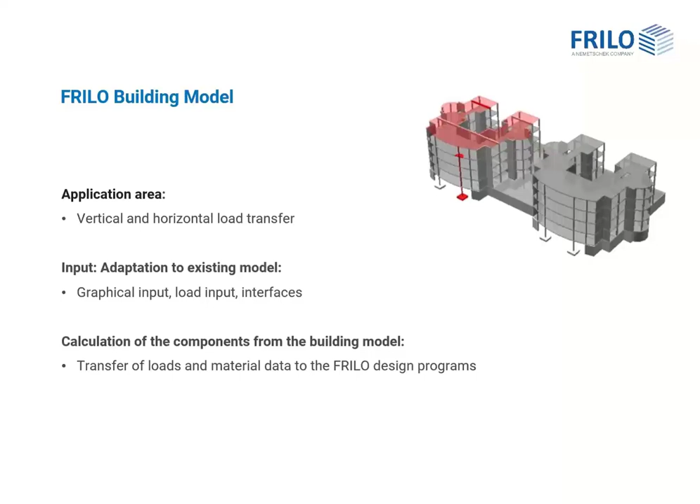And after this, we want to look at how and where the loads and material data of the building components are transferred to the FRILO design programs. But now let's begin with the vertical load transfer. The building model calculates the vertical support forces using a plane finite element calculation on each floor, and both the entered loads and the dead weight of the building components are taken into account. The support forces calculated at the base of the building components are distributed evenly over the length of the walls, and they are all transferred to the floors below.

So the program calculates the vertical loads downwards from floor to floor. And this is executed until the program does not find any further building components, like a ceiling, a wall, or something else, at the base of a wall or a column. So if the program does not find any more load-bearing building components, a foundation is created at the base point. So this allows the foundation loads to be calculated quickly and reliably.

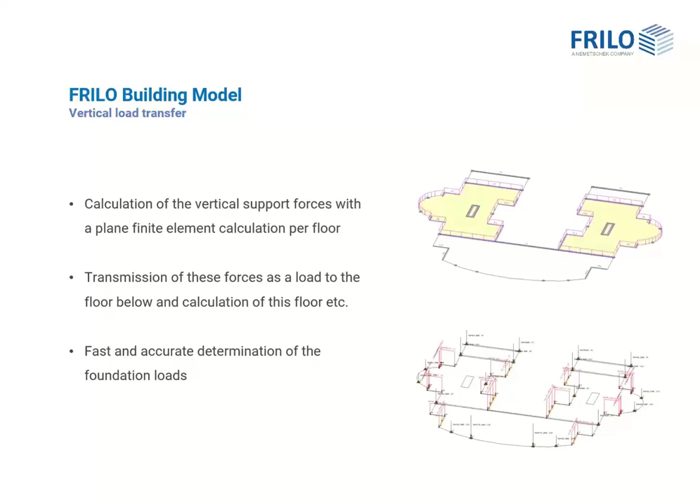The horizontal loads are distributed to the walls and columns which are defined for the horizontal load transfer, and this is according to their bending stiffness. And these horizontal loads can be entered manually or calculated internally by the program for wind, earthquake, and inclination.

Each moment at the foot of a stiffening wall, resulting from the height of the floor, is converted into a force couple and applied to the floor below. So if the system does not find a load-bearing wall, the resulting load is distributed to the other walls in this floor via a finite element calculation. So this means that even non-continuous stiffening building components can be taken into account.

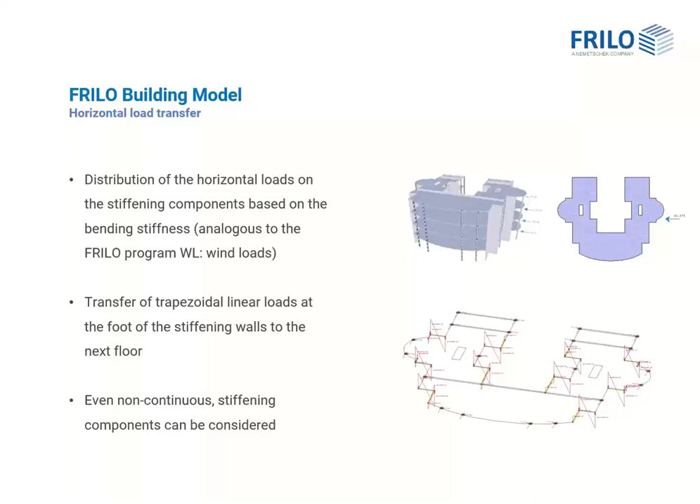The entire calculation in the building model is always performed for the characteristic loads and is therefore completely independent of the safety concept. But to transfer the building components to the corresponding design programs in FRILO, the design standard can already be assigned to the building components in the building model.

And also in the building model, the action groups are already assigned to the load cases, which are also required for the transfer to the design programs. And this enables a simple transfer of the loads and the support loads to each design program.

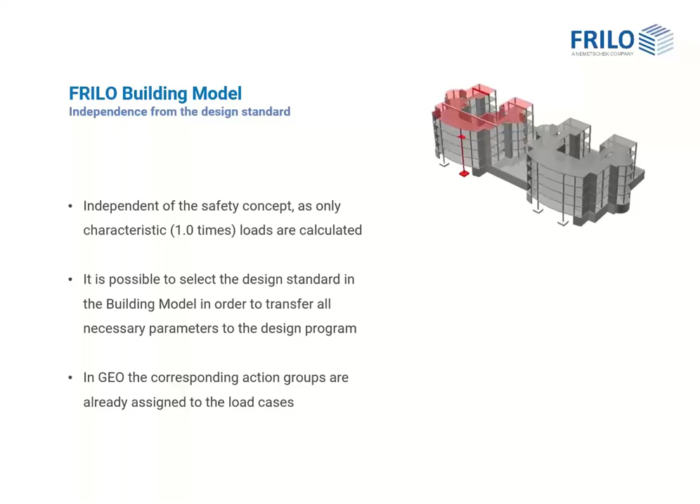So now let's take a look at the calculation approach. The building model is not based on the approach of a folded structure. Therefore, there's no three-dimensional calculation like SCIA does. Each floor is considered individually, so the calculation takes place floor by floor. And this means that a wall in the basement is unaware of the stiffness of a wall in the upper floor. And only the bearing forces of one floor are transmitted to the floor below.

For the horizontal load transfer, only non-displaceable systems can be considered. Something like a pure frame system would become too soft, as the frame effect cannot be taken into account.

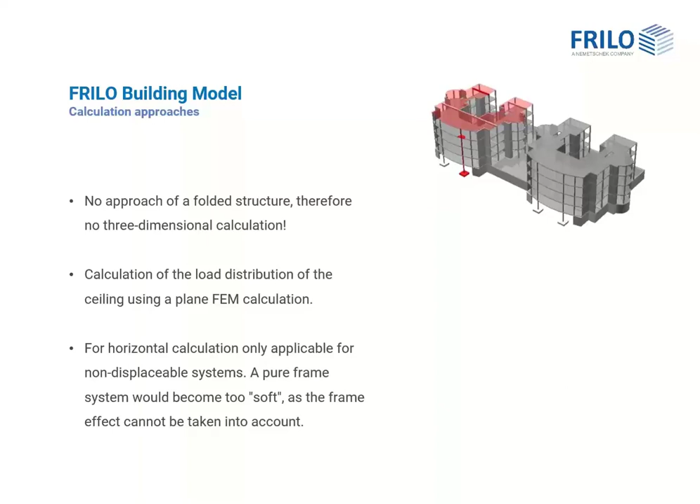So now let's take a look at the input of the floors. There are different options for entering the floors. Of course, the building can be entered using coordinates via the graphic interface, and a floor can also be entered using an imported DXF file, and this file is inserted as a background file, and the program can use the data from this file as snap points, and this is for the input of all building components and loads.

Then it's also possible to import the building data using the interface to CAD programs such as Allplan or Glaser. And after the calculation, the design results can be transferred back to these CAD systems. I will tell you more about this later.

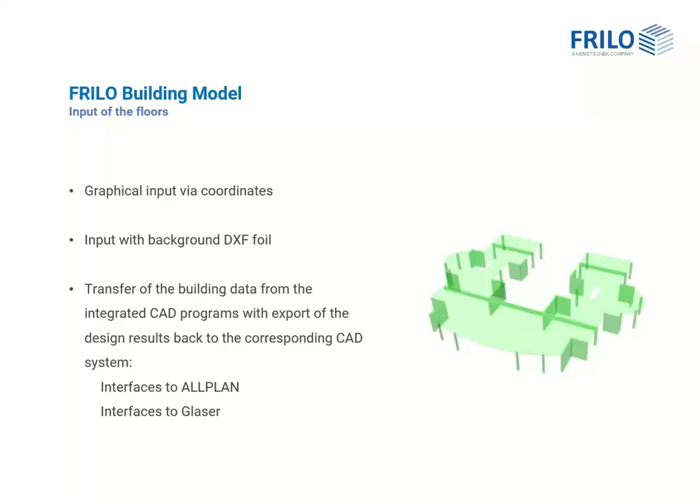But now let's take a closer look at some of the graphical input and the load input in the building model. As this webinar is intended to give you more of a general overview of the building model, we will now assume that I have already entered a floor slab into my building model. And therefore, I would like to show you some, I would say, special features when entering a building with our FRILO building model.

At first, the program always offers an overview of all entered floor levels. And there it is always possible to rename these floors as I wish. So now that I have entered my first floor as a slab, I wanted to define some loads on it.

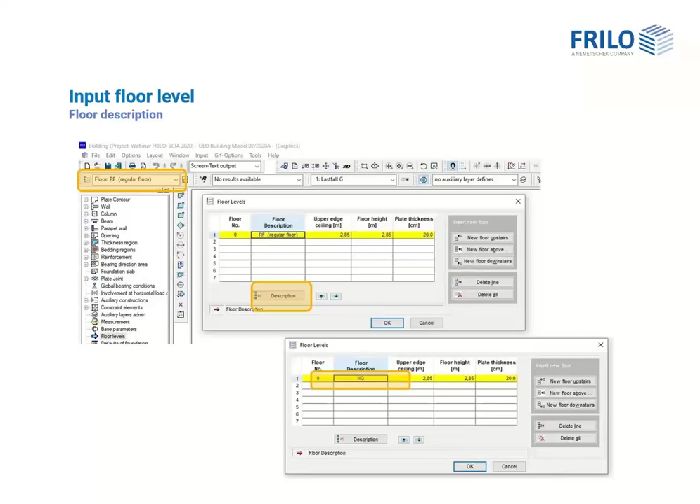The vertical loads are entered floor by floor and defined according to their action group in different load cases. The loads in one load case are always applied together. So be careful, there's no automatic recognition of the unfavorable load position of a surface load. So a load distribution by fields is only possible with different load cases.

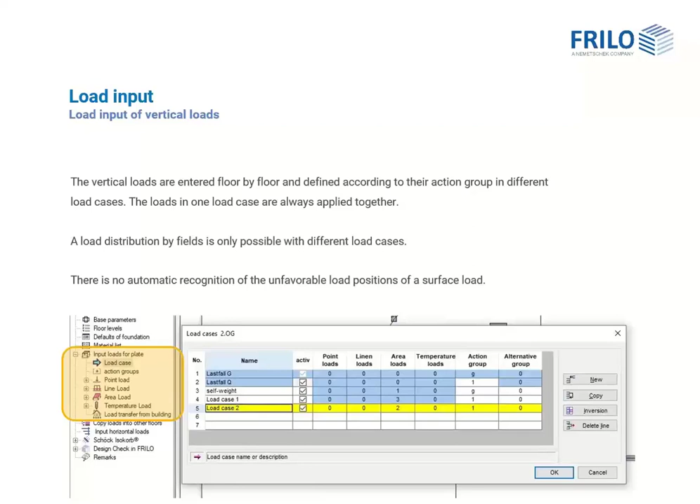So now let's assume that I have now entered all the loads on my first slab. And now I can open an overview of my already entered floor in the program. And there's the possibility to copy a whole floor with all of its components and loads. And let's say, for example, I copy my existing slab one floor up. Then the program asks me if I want to copy the data of this slab into my new floor. We accept by pressing yes.

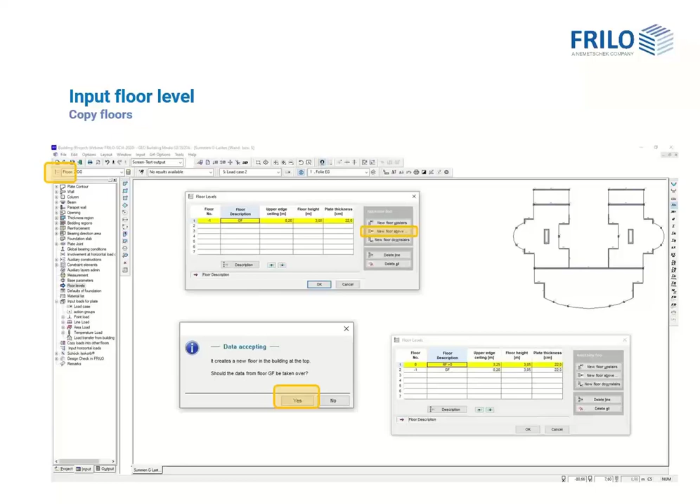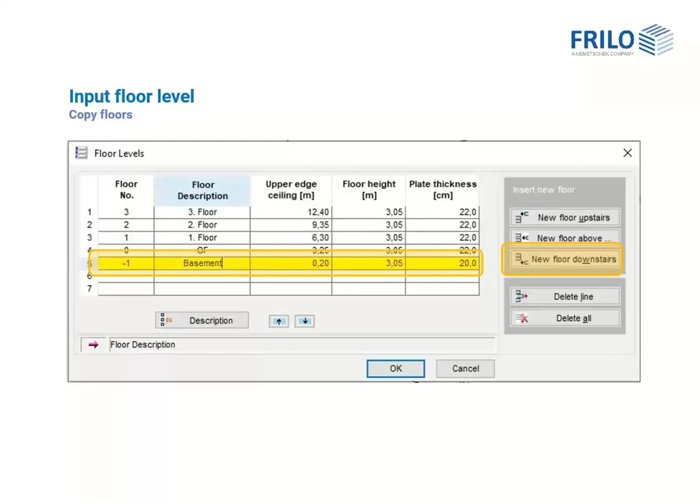And then the program copies my entered slab upwards and renames it. So now we can create our building very easily and quickly. In this example, I have copied my entire ground floor up 3 times. And just the same way, I copied my ground floor down once to create my basement. And of course, I can still adapt these floors as I want to. And in this example, I adapted and enlarged the basement as an underground car park. So now let's go back to the interface of the building model.

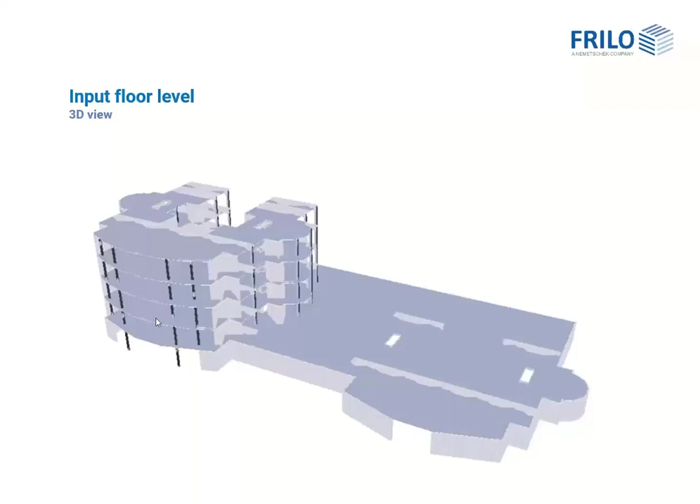And here it is always possible to display the model in a 3-dimensional view. With this button, you can open the 3D view. So here we can see that I have copied my ground floor 3 times up and 1 time down and adapted a larger basement. So now I could also copy the left building to the right side of the basement just with using one single function in the building model. Or I could simply enter a different geometry on the right side of the building.

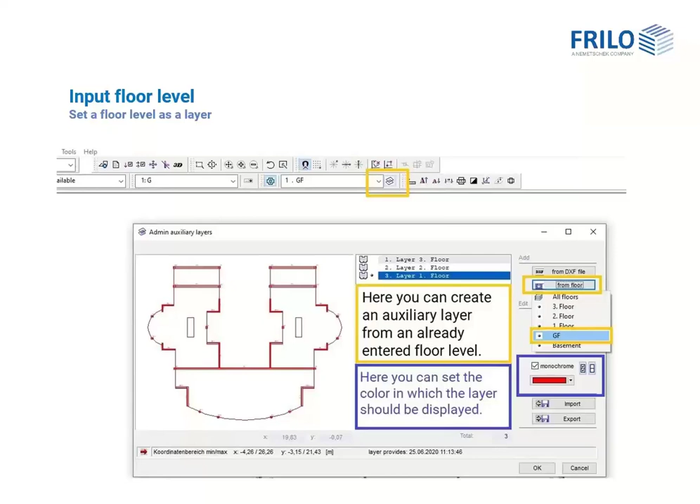It's also possible to create a floor using an auxiliary foil. In addition to DXF foils, the building model offers the possibility to define an already entered floor slab as a foil. So in my example, I can create a foil from the ground floor that I have already entered, and I can freely choose the color of this foil. So here you can see in gray that I'm working in the basement, and the program shows the auxiliary foil of the ground floor in red.

And now I can enter my building components more easily and more precisely. And it also shows me that in this area, I have two columns which put load on the slab. So I can quickly see that some load-bearing building components are still missing there.

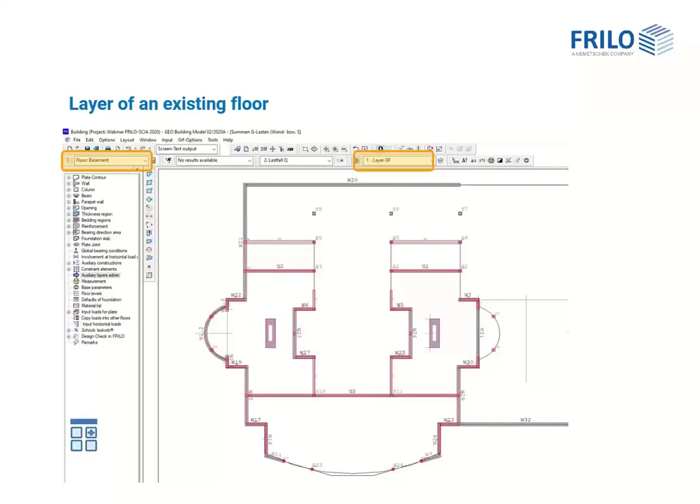So let's say I've now entered or copied the different floors of my building. I have entered or copied all the loads. And with this section here, it is still possible to change or edit single building components. So I can still add some columns, walls, or beams, or I can move them or delete the existing ones. And once I've adjusted everything, I can now calculate my building.

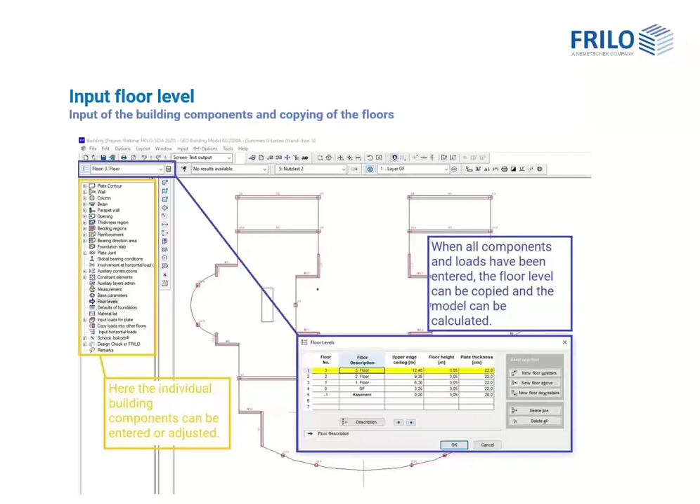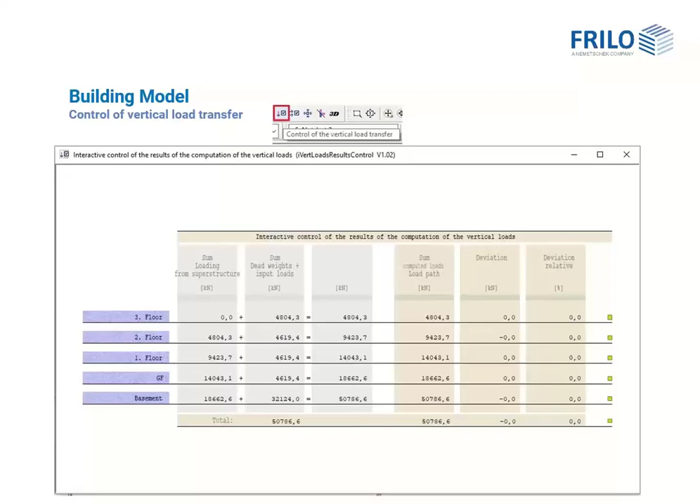So now I'm finished with special graphical input and load input of the FRILO building model. And this leads us to some information about the building components and how to transfer loads and material data from the building model to some other FRILO programs. So let's say our building is entered completely. We have checked if all the loads are entered correctly. And now the big question is, can I construct the building according to the architect's concept?

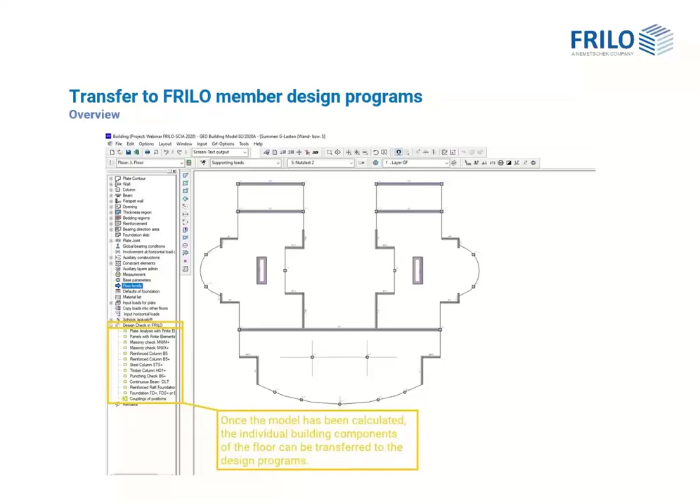But before we do this, I would like to give you a short overview of what can be transferred from the building model to the other FRILO programs, as you can see here. So, of course, you can transfer slabs to the program slabs with finite elements, PLT. You can also export walls, or we can export to some masonry programs like MWX+, which is able to handle the horizontal loads. Then, of course, all three types of columns, steel, timber, concrete. We can perform a punching shear check with the program B6+.

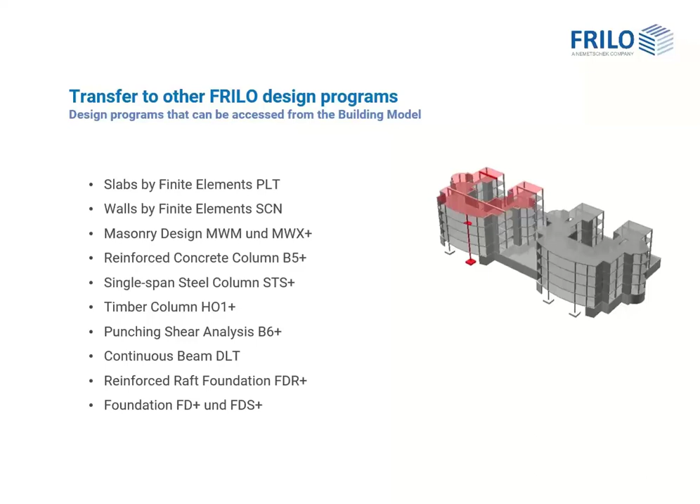Then, of course, we can export some beams to the program Continuous Beams DLT, which is one of the most used programs in FRILO. And of course, all types of foundations can be exported, like reinforced raft foundations, single foundations, or everything else. So now let's see how we can access our design programs from the building model in our example. This is one slab from our building.

And as we can see in the lower area of the slab, the area is very wide, approximately 9 meters, and the slab is only 22 centimeters thick. So I have to think about if this is doable and what about the deflection of the slab in this lower area. And then we should also look at the punching shear check of one of these columns. And of course, we also have to check the columns themselves and the foundations.

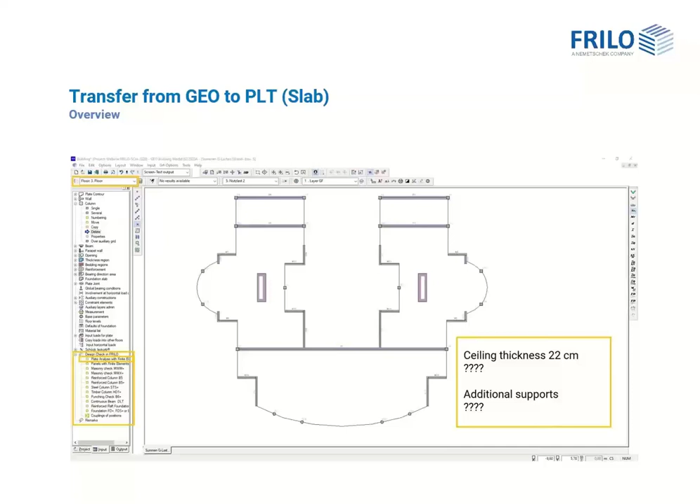But first, let's say we transfer this slab to our finite element program PLT and check this lower area. So for this, we choose design checks in FRILO and plate analysis with finite elements, and we export this slab to the program PLT. So let's say we have transferred it and calculated the slab in the program PLT.

And here we can see the deflection in state 2. And we also can see that we have a max deflection of more than 90 millimeters. So the slab cannot be constructed in this way. It's too large a deflection.

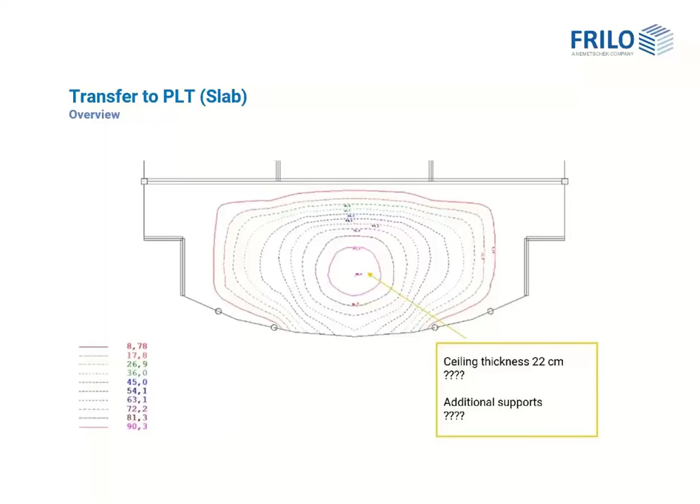But before we think about this, we should also check the shear reinforcement. And if we look at the column at the bottom edge, we can see that a punching shear check is necessary, and we can expect large loads at this point because of the large reinforcement needed. So now we have two options. We can adjust the thickness of the slab, or we can add some supports.

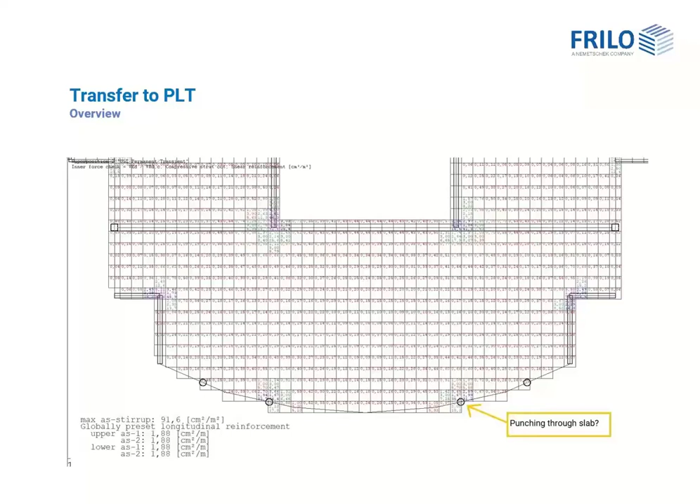So let's say we choose to add some columns. We are still in the PLT program, and here we click onto column and choose several. We decide to add 3 more columns in the lower area. And after we have placed our columns, a pop-up window appears. And there we are able to set all the values of the columns that are necessary, like the form, the dimensions, the material, or the bearing conditions.

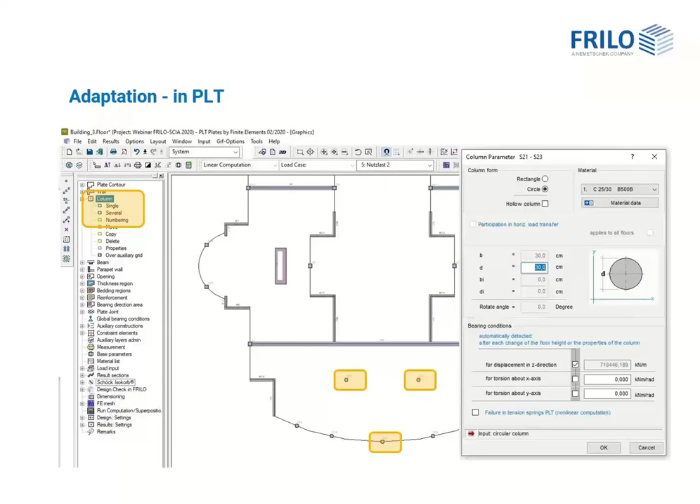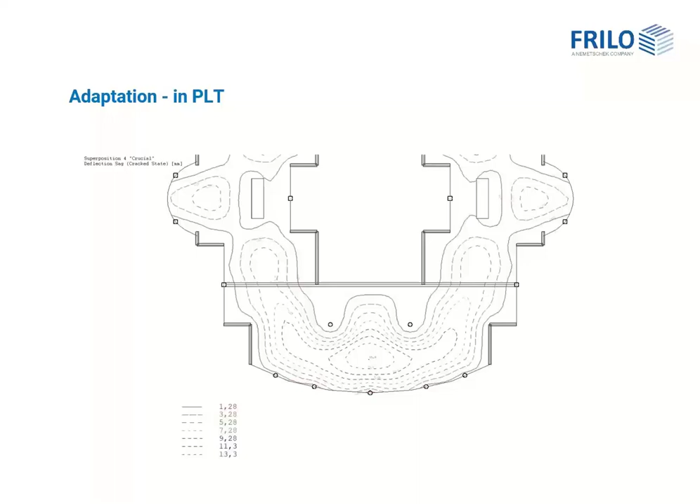So now we have placed these three columns, and now let's calculate our slab and take a look at the deflection of the slab again. So now the deflection is reduced from over 90 millimeters to less than 14 millimeters. So the slab can remain 22 centimeters thick with only these 3 added columns. So let's say we are finished with our adjustment of this slab, and let's go back to the building model.

When we close the PLT program, the building model asks whether I want to transfer the changes to my building. In our case, these 3 new columns. But I have to say that this only works if the building model is opened in the background. So let's say we want these three columns in our model, and we confirm by clicking on yes, and then they are transferred to our building model.

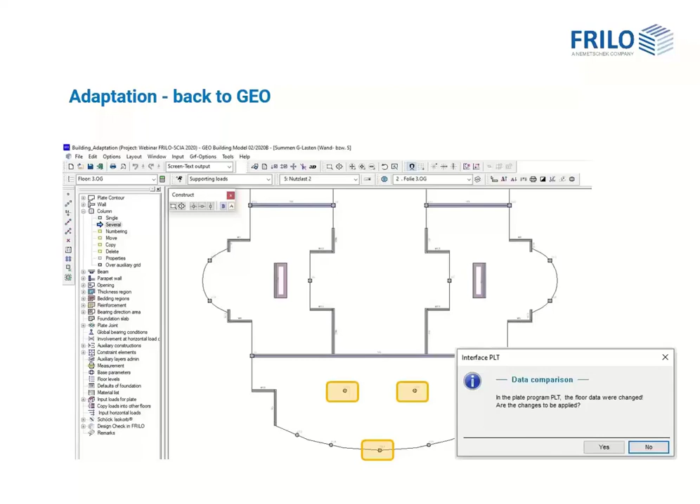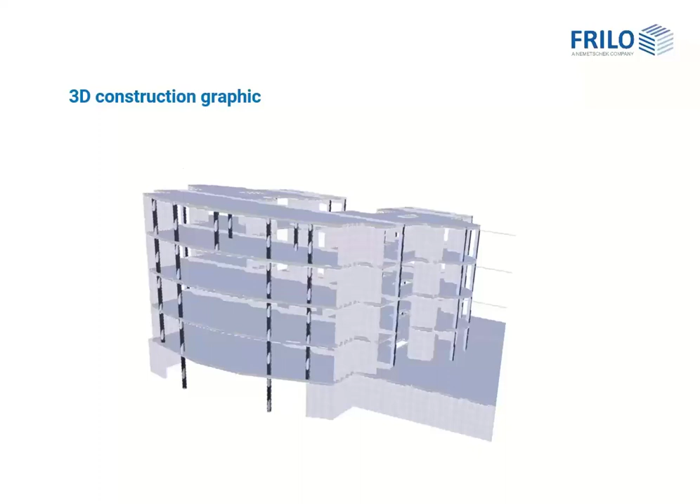But let's check this via the 3-dimensional graphic in the building model. So now we can see that the columns were only transferred for 1 slab. And since I have only exported 1 slab to the PLT program, this makes sense. But we need these columns in each floor of our building. So in the next step, we go back to the building model and we go to the next slab. Let's say we go 1 slab down.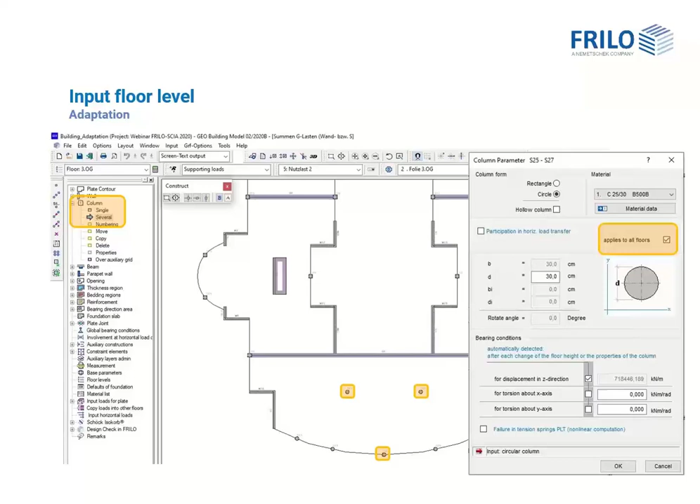So now we can create a foil from the already adjusted slab to see where our columns must be placed. Then we enter once again these 3 columns, and in the pop-up window we now select applies to all floors. And then our 3 new columns are added to all the existing floor levels of our building. And the program notes that these 3 columns already exist on the top floor and will not create double columns.

So now again back to the 3-dimensional view of our building, and now we can see that our columns are in the entire building, and a load transfer is ensured. So in the next step, we want to look at the punching shear check of one of the new columns. So we are still in the building model, and in the menu Design Checks in FRILO, we click on the button Punching Shear Check B6 Plus and select one of the new columns. In the pop-up window, we can see that the program already knows which type of column we have selected and shows us the shear force.

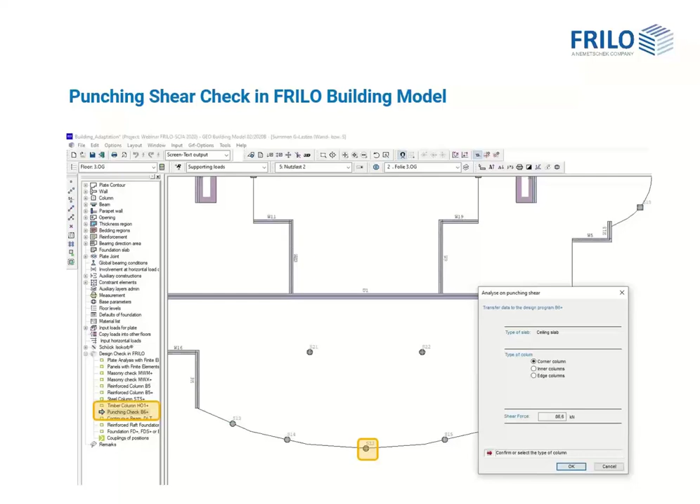But before we go on, let's check how the shear force of 86.6 kilonewton is composed. In the building model, we can display the supporting loads for each load case. The permanent load from self-weight is about 68.4 kilonewton, and the payload from load case 1 is 18.2 kilonewton. And this gives us a characteristic load of 86.6 kilonewton, which is exactly the load the building model transfers to our punching shear check program. So now let's go on with our punching shear check in the FRILO program B6 Plus.

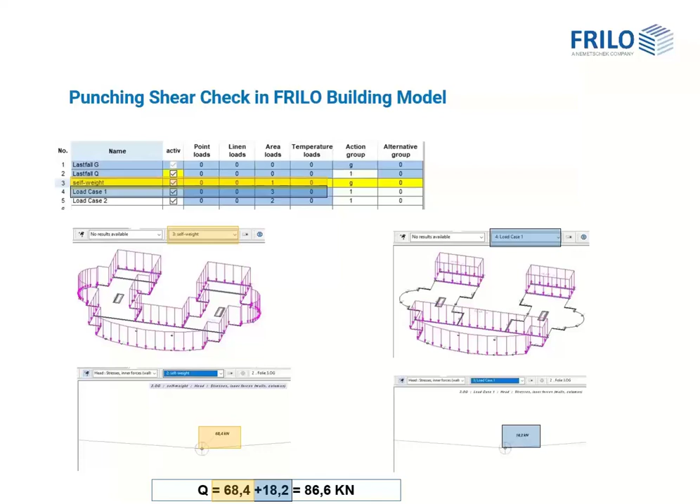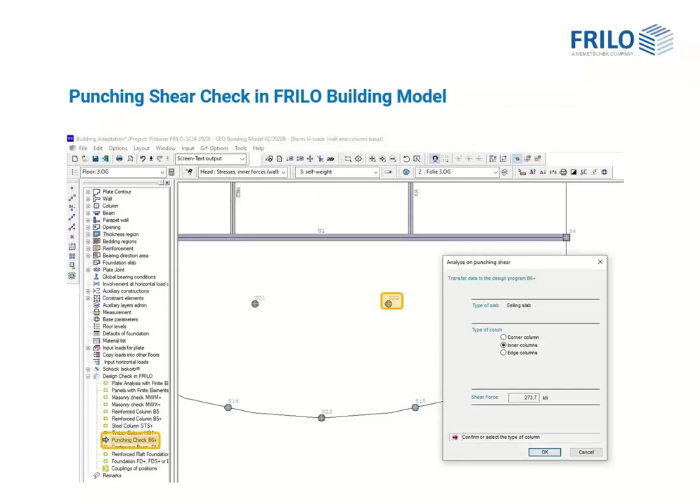So let's analyze the punching shear of one of these inner columns, like before, via the design checks in FRILO. We click on the button punching shear check B6 plus and select one of the inner columns. The selected column has a much higher shear force of nearly 280 kilonewton. So after we have confirmed with OK, the FRILO program B6 plus opens like before. And in the lower corner, there's now something in yellow. And if we click on the button checks in the upper menu bar, an advice window pops up. And this tells us that some punching shear reinforcement is required. So let's add some reinforcement, but how and where?

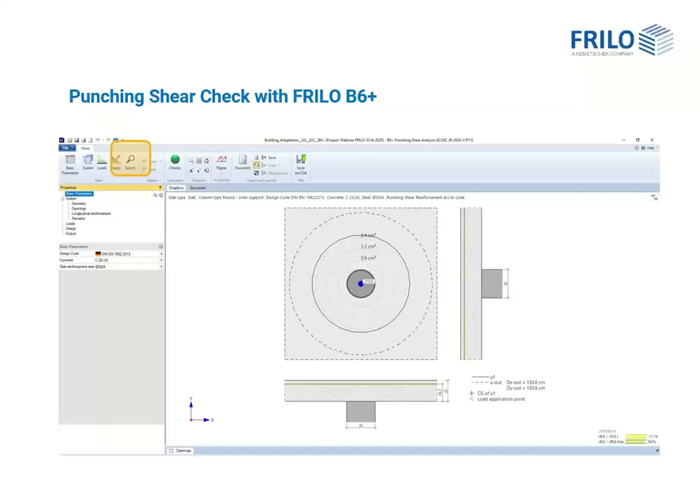In every Plus program from FRILO, you can use the search function if you don't know where you can find any input. If we search for the punching shear reinforcement, it's enough if we type the beginning of the word, reinf. The program then offers you a selection of possible inputs. So now we know where to enter our reinforcement.

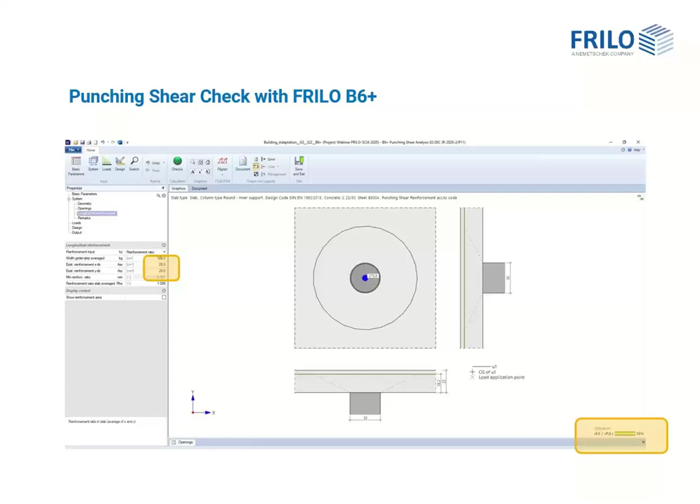And after we have added some reinforcement to our slab, the utilization turns green. And if we click on the check button, we can see that now no more extra punching shear reinforcement is required.

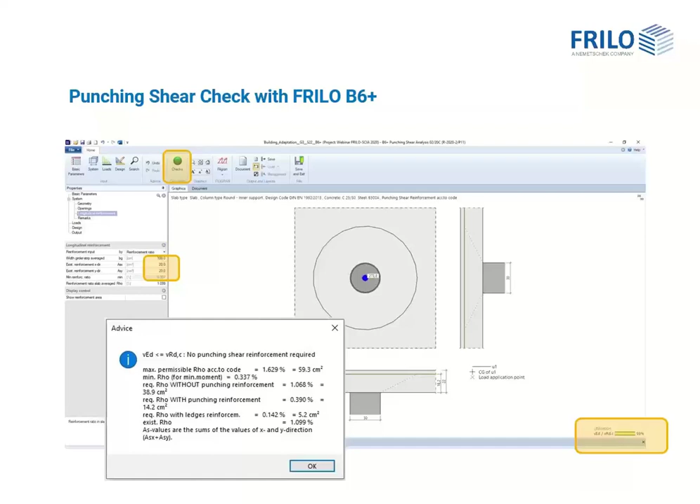So okay, after the punching shear check, we now want to look at some of our edited columns themselves. So we go back to the building model, and via the design check in FRILO, we click on the button reinforced column B5 Plus and we select one of the new columns. In the pop-up window, we can see that the column goes from the basement to the third floor, and the program already knows which column we have selected and in which floor level we are. You can see the little dot.

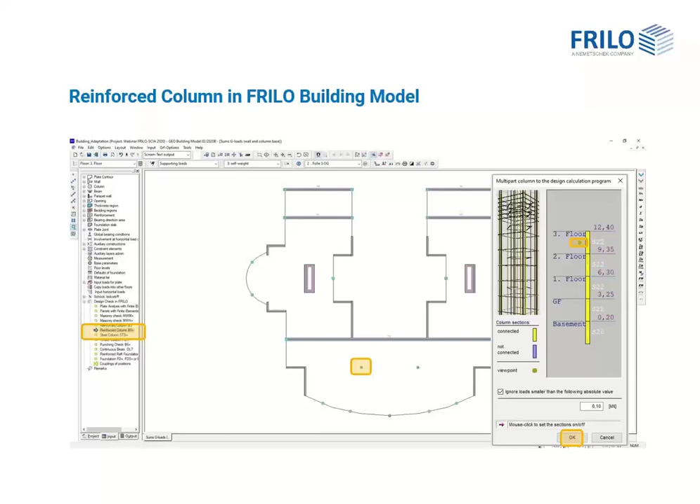So now I can choose if I want to calculate a system with all these columns working together from the basement to the third floor as a chain of pendulum columns, or if I just want a system with one column in my selected floor. But let's say I want all columns together, and we confirm this pop-up window by pressing the OK button. Then the program B5 Plus opens.

And here we can see all columns from each floor as a chain of pendulum columns, and they are all fixed to each slab of each floor of our building. The program calculates all the required reinforcement per section or per segment. And as we can see, the reinforcement is displayed in green, so it's okay. But down below, there is a warning in yellow that says that the creeping is exceeded by 3%.

Now the question, where can I find some information in the program about creeping? This time, I don't need to use the search function because some very important settings are shown on the main graphic interface of the Plus programs. If I click on the text about the creep factor on the interface, a pop-up window opens, and there I can switch to ignore creep effects, and the program will not calculate with creep factors. Here I just wanted to show you how simple it is to change some relevant parameters for the calculation via the graphic interface of our programs.

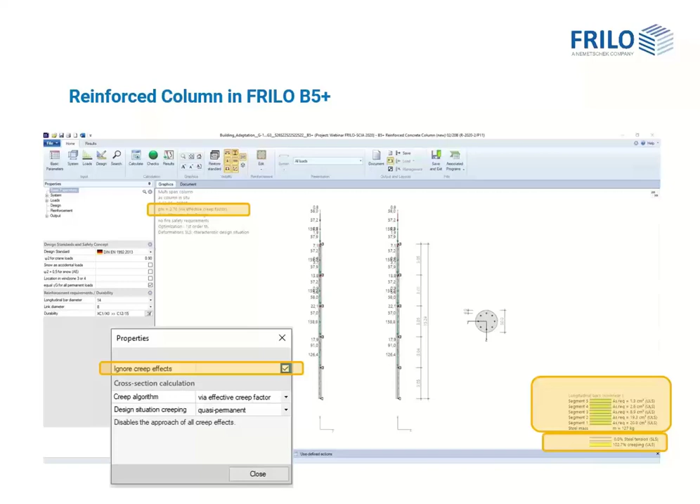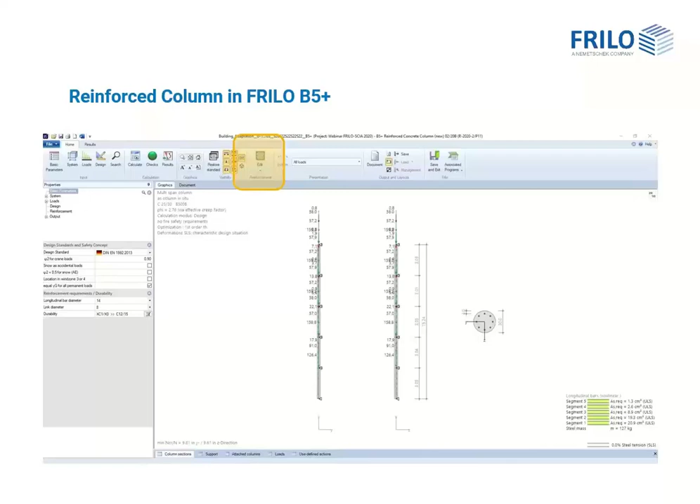So after we have ignored the creeping, the yellow note disappears, and now we can look at the reinforcement of our column. In the program, we can click on the button Edit to open a dialog to adjust the reinforcement. In this dialog, we can choose one of the 5 segments of our column. And let's say now I'm in segment 2. And here we can adjust all the necessary reinforcement of this column. When we are ready with this, we can save this position to our static and we can go on.

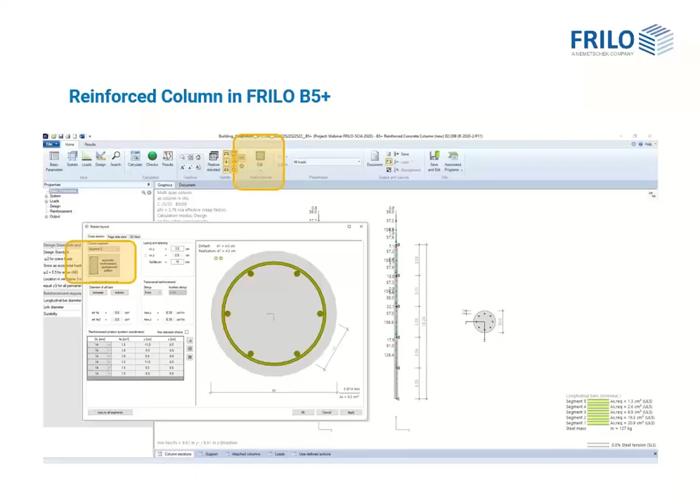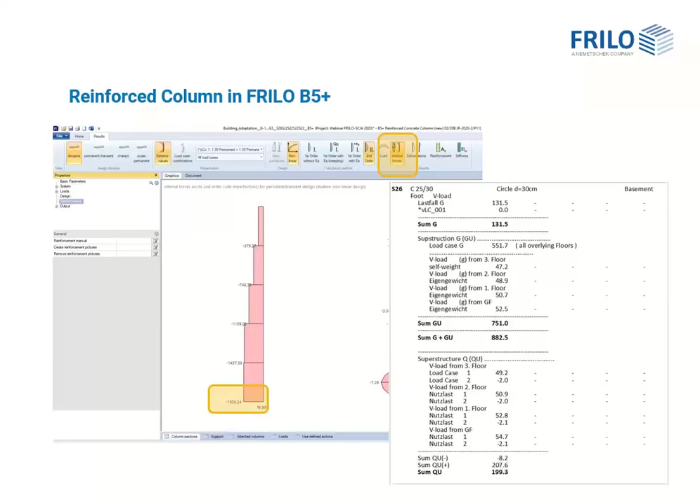But before we do this, let's check if the loads applied here can be verified within the building model. So in the program B5 Plus, we go to the internal forces and look at the axial force. The design force is calculated with 1,505 kilonewton at the bottom of the column. So now we look at the output of the building model and go to our column. And there we can see each load from each floor separated into permanent loads and payloads.

So now we can convert these characteristic loads into design loads. And this gives us a total design load from the building model of 1,503 kilonewton. So the loads calculated in the building model are therefore correctly transferred to our reinforced column in the program B5 Plus.

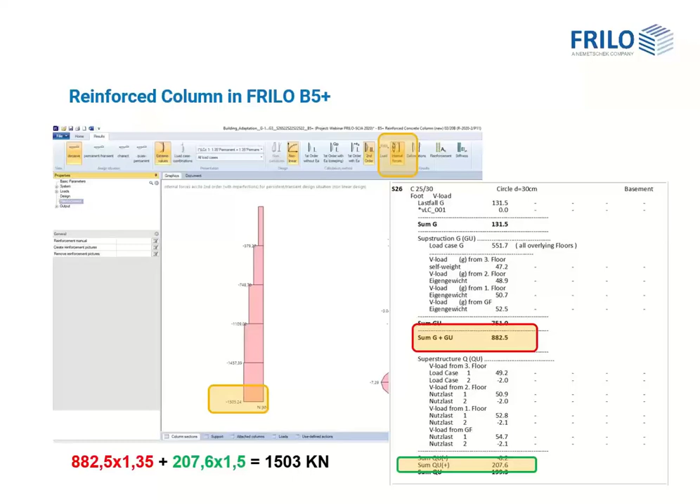So after we have finished the column, let's take a look at the foundation of our building. So we are back in the building model.

If we don't enter a base slab in the program, the foundations are automatically created at the base points of the last load-bearing building components. So in order for the program to be able to dimension the foundations, we have to specify certain parameters in the building model. So for this, we have to click on the defaults of foundation button and enter a value for the characteristic soil pressure.

And with this characteristic value, the program calculates the dimension of the foundation based on the characteristic foot loads at the bottom of each load-bearing component. So what we see here is only a pre-dimensioning made by the building model. So now we want to calculate one foundation with another FRILO program, let's say the FD Plus. So we click on the left side at the button Foundation FD Plus, and let's say we choose the foundation under one of our new columns.

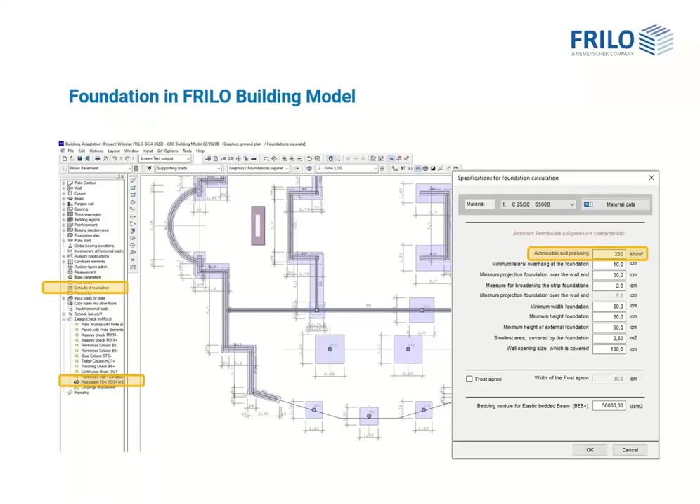So now the FRILO program for isolated foundations FD Plus opens. And as you can see, the building model chooses a measurement of 2.22 for this foundation, which are almost fully utilized. So the program converts the characteristic soil pressure to a soil pressure resistance with the factor of 1.4. And the program also calculates the reinforcement, and this can be adapted and exported if necessary.

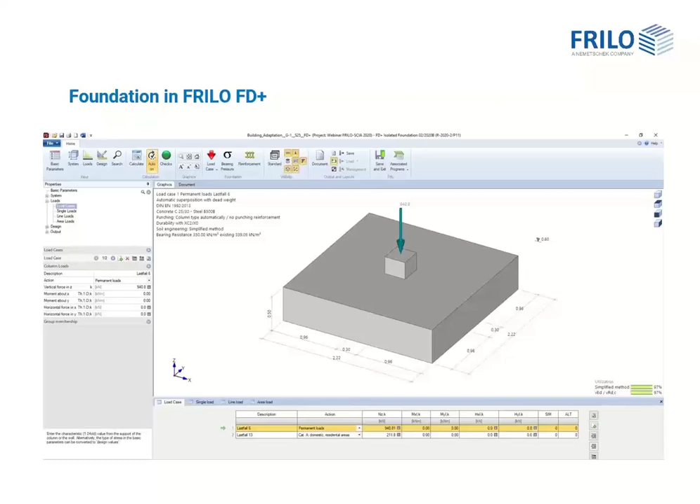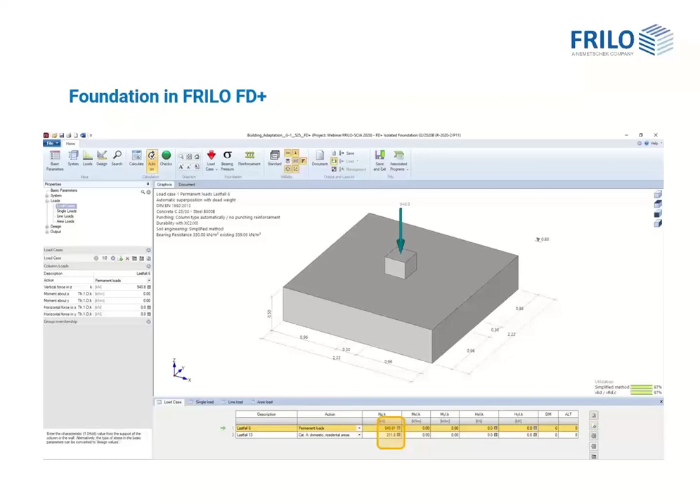But now let's check where these two loads come from. We have a permanent load of 940 kilonewton and a payload of 212 kilonewton. So let's again go back to the building model and check these loads in the building model. And yes, in the building model, it is possible to look at the sum of all permanent load and the sum of all payload at the bottom of each load-bearing building component, and this is possible in each floor.

So if we go to the basement and look at the column above our exported foundation, we can find the same permanent load of 940 kilonewton, and we can find the same payload as we have seen in the FD+ program. So again, the loads calculated in the building model are correctly transferred to the foundation program. So after we have looked at the foundation, we are finished with the main part of the presentation.

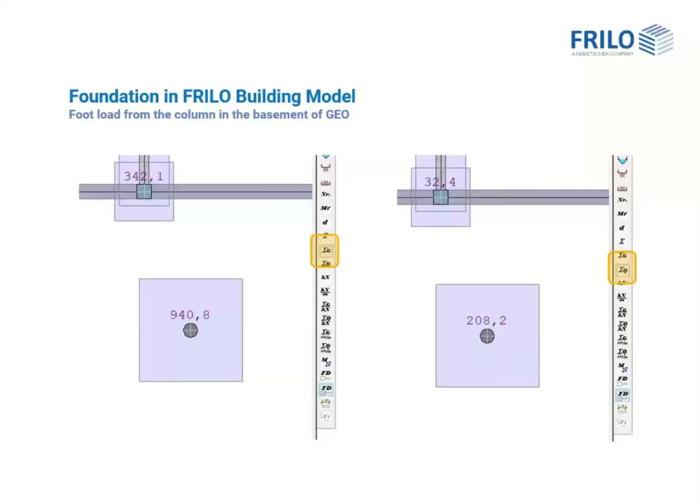And in the next step, I want to show you some of the interfaces that are already implemented and some of our new interfaces. In the FRILO programs, you always have the possibility to transfer loads to other building components, of course. And like I have already shown, you can transfer loads from the building model to the design programs. But there are also some external interfaces, like the import of 3D data from Allplan. And also you can export the selected reinforcement from FRILO programs to Allplan and Glaser. So you can do it also the other way around.

And on top of this, we have implemented some new interfaces. Since 2019, it is possible to transfer 3D data from the building model to SCIA Engineer, which I want to show you in the next slides. But also there's the brand new FRILO BIM Connector, which will be introduced in the next release. And I think the next release will be launched in about 3 or 4 weeks. But now let's take a look at the interface from FRILO to SCIA.

So we are back in the FRILO building model, and we have already finished the input of our building. So now there's an option to export my whole model to SCIA. For this, we just have to click via File on Export, and there we have the option to choose the export to SCIA via Excel. So then the program automatically creates an Excel file with all the data that is necessary for the transfer. And after we have selected a location for our Excel file, a transfer window appears in the building model.

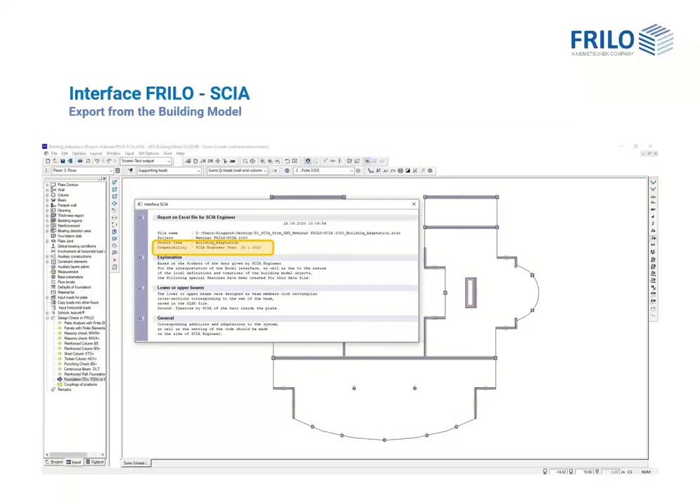And this protocol contains all the adjustments that may be necessary and that still need to be made in SCIA. And it is important to know that the SCIA version to which this file applies is listed in the protocol. So after we have created the Excel file from the building model, we can now import this file into SCIA. In SCIA, it's also very simple. You just have to click on File Import, and there you can choose the option FRILO Geo Building Model.

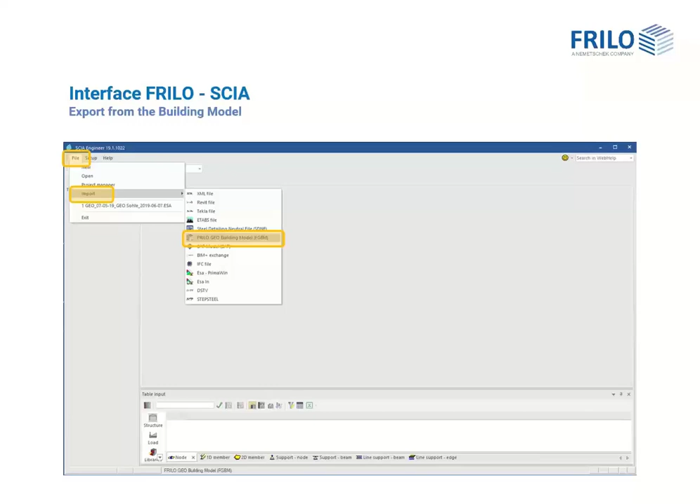So then our model is imported into SCIA, and it includes all the loads and bearings. So now you can continue calculating in SCIA with the building created in FRILO. And this has the advantage, for example, that in FRILO we only use the simplified response spectrum method in the building model for the earthquake load case. And if it's necessary to calculate the earthquake check by using a 3D analysis, you can quickly transfer this building from FRILO to SCIA.

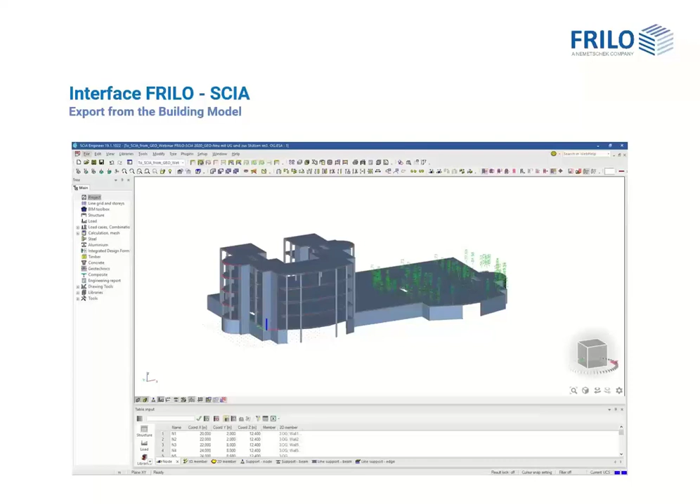At the moment, only files can be transferred from FRILO to SCIA. The way back does not exist yet. So now I would like to show you some of the interfaces between FRILO and Allplan.

So I have opened the surface of Allplan and would now like to transfer a slab to FRILO. By now, it's only possible to transfer one slab at a time to our finite element program PLT. And once I have selected a slab, I can transfer it directly to FRILO using the transfer options in Allplan.

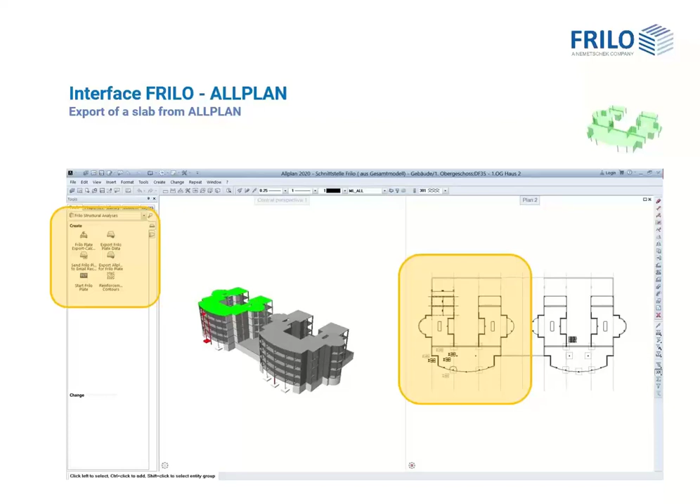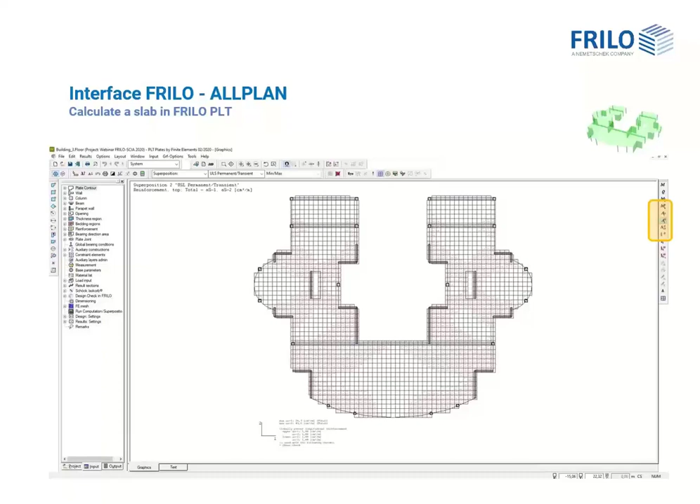So let's say I choose this slab. Then FRILO will open automatically. And in the FRILO FE program, we now can edit all the loads and calculate the slab. And after this is done, we know all the required reinforcement for our slab. So, and now it is possible to return this information back to Allplan.

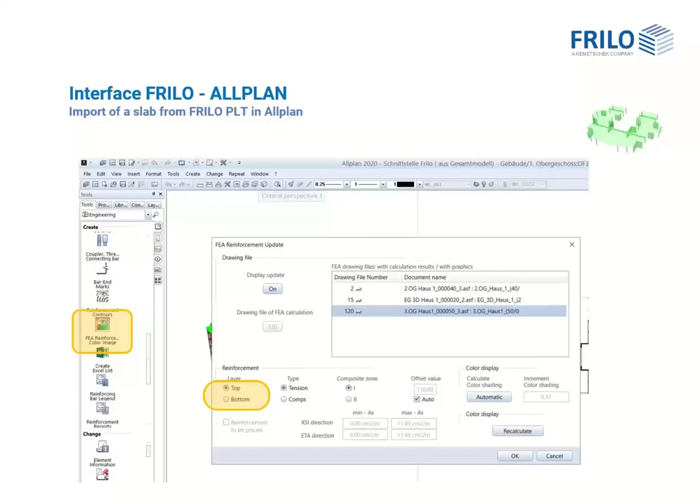And after I have saved the FRILO position, Allplan asks me where I want to save and implement these results. So for example, I select the upper reinforcement and can now place the results behind my slab. So now the results of the FRILO calculation are also displayed in addition to the slab I've already entered. So I immediately see that the largest reinforcement is needed in the area of these two inner columns.

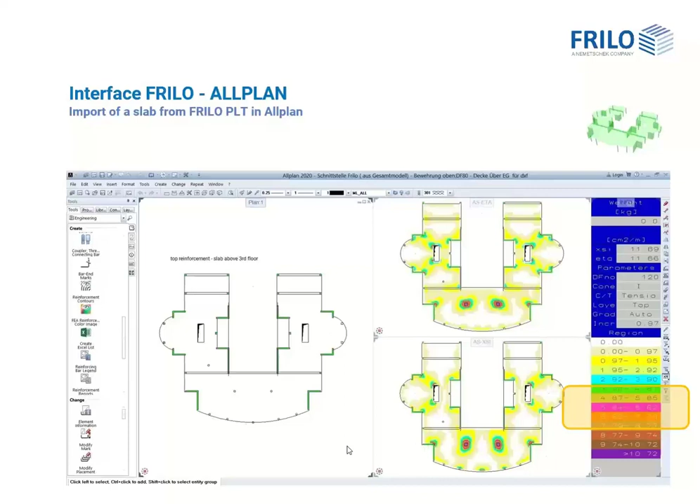So now in Allplan, I can start to reinforce my slab. So now let's say I have placed some mesh reinforcement all over the slab. And while I'm doing this, Allplan automatically adjusts the color of the reinforcement still required. So all areas that are white don't need any further reinforcement.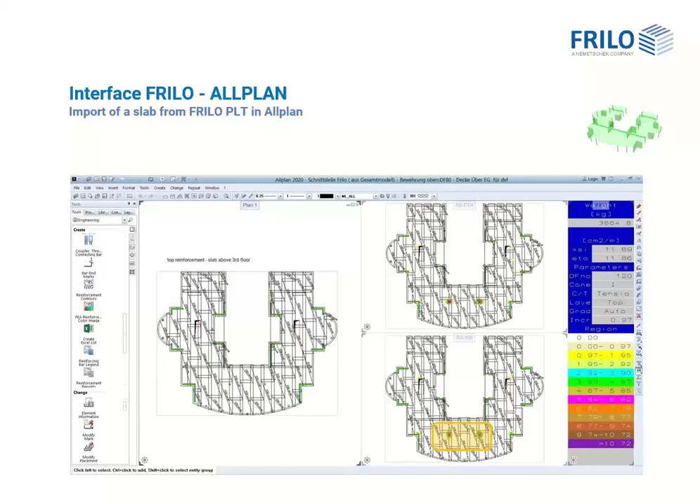So I realized quickly that I still need some reinforcement above the inner columns. And I can continue with my reinforcement. This was only a small view of the interface between FRILO and Allplan. There's much more. But now I also want to give you some information about our new FRILO BIM Connector.

So with this tool, you can, for example, import an IFC file received from an architect. But architects usually work with a structural model, like a volume model. And to transfer the model into any static program, it needs to be converted. And all the relevant components must be related to the building axis, to the component axis. So this is possible in the FRILO BIM Connector with just one click.

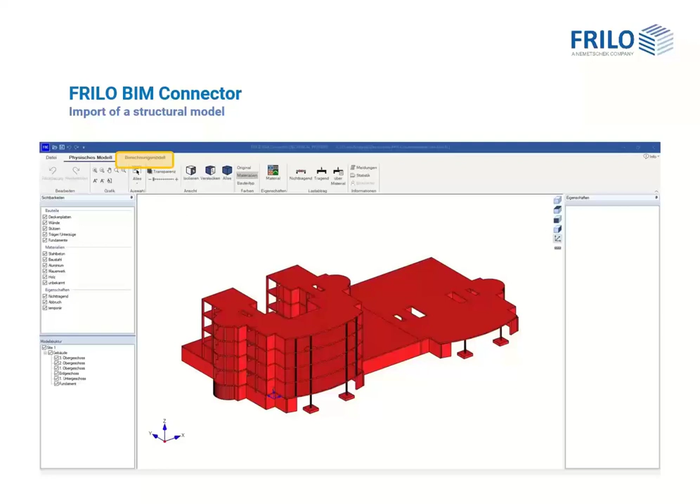And this option allows you to convert the imported structural model into an analysis model. So now we have an analysis model with which a structural engineer can continue working. The system axes are all connected and all building components are detected, such as beams, columns, walls, slabs, foundations.

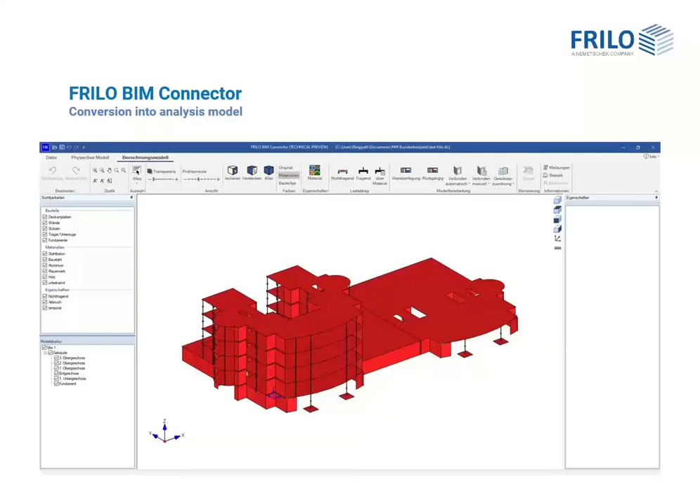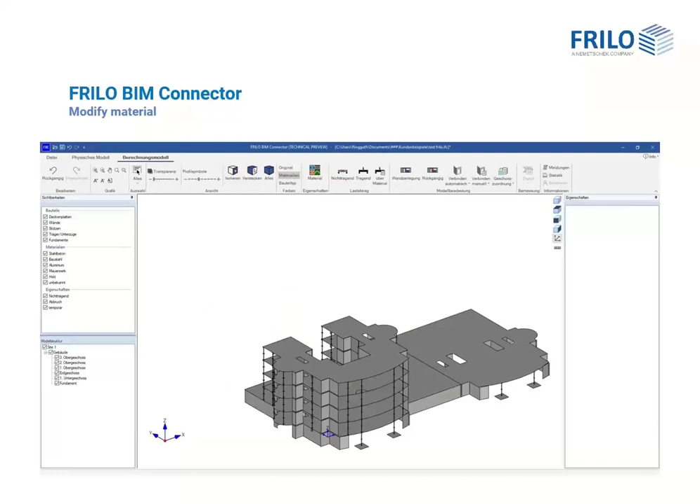In the graphic interface, we can see that the whole building is displayed in red. So this means that no material is assigned to the different building components. So in the FRILO BIM Connector, it is now possible to choose a material for the whole model or only for an individual building component.

And in this case, the whole model was assigned the material reinforced concrete, and therefore it is now shown in gray. I could also change some material to masonry or to wood or something else. But here, everything was assigned to the material reinforced concrete.

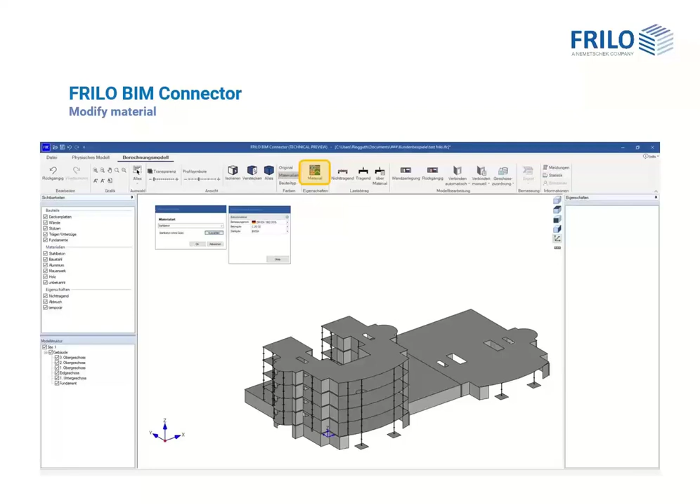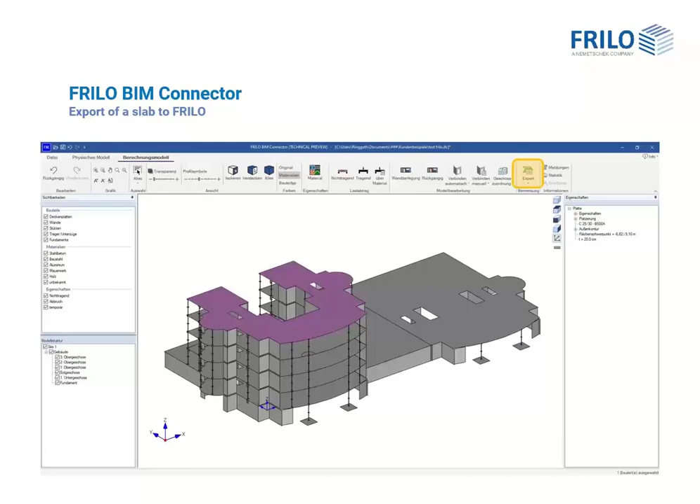So once we have converted our building into an analysis model and all the building components have the right material, let's say, we can export a slab to our FRILO program PLT. And in this example, let's say the upper floor slab is to be transferred to our FE program PLT. So all you have to do is to select the slab and to click on this export button.

So then the FRILO program PLT opens and the slab can be calculated. So here you can see the exported slab with the calculated FE mesh. And with the upcoming release, as I told you, it is only possible to transfer a single slab to the program PLT. But in the future, it will be possible to transfer not only the building model, but also some building component programs like columns, beams, foundations, or else.

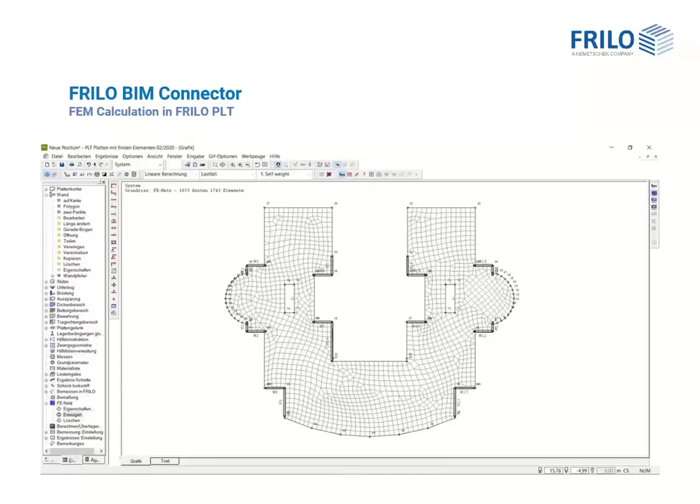So this brings me to the end of my presentation. I hope I was able to give you a general overview how FRILO and the building model work. And I hope I was able to show you the advantage of the load transfer in one model, but the component calculation in individual programs.